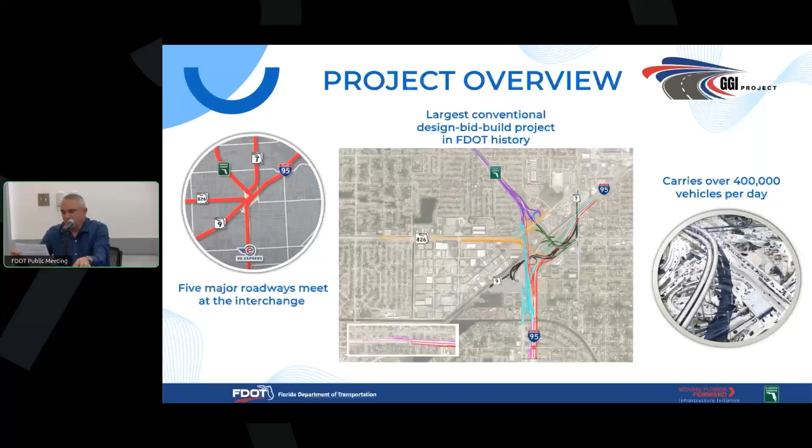The main purpose of the GGI project is to enhance regional mobility and revitalize this major transportation interchange, which includes connections to five essential roadways: I-95, Palmetto Expressway, the Florida Turnpike, State Road 9, and State Road 7.

The GGI project is part of the Moving Florida Forward Infrastructure Initiative. As part of this initiative, FDOT identified previously approved projects that were lacking funding for construction. $4 billion from the general revenue surplus has been dedicated to this initiative to advance construction projects around the state, such as the GGI project, that will address congestion, improve safety, ensure resiliency of our transportation network, and enhance Florida's supply chain and economic growth.

Let's take a look at the project area. This is an overhead view of the interchange. The Palmetto Expressway and Northwest 19th Avenue are the limits to the west. The limits to the east are at Northwest 167th Street and Northwest 2nd Avenue. The north limits are Northwest 199th Street and the Florida Turnpike, and Northwest 135th Street along I-95 are the south limits. The highlighted area represents the additional scope along the turnpike that was added to the GGI project.

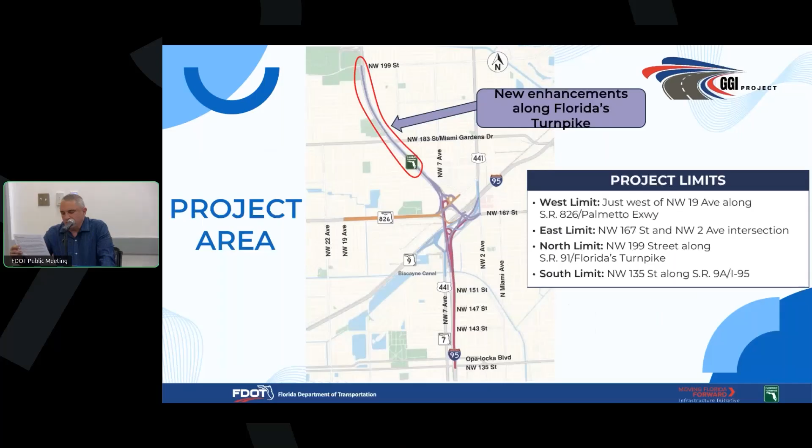One of the most significant components of the project is the construction of 34 new bridges. These bridges are designed to enhance regional mobility by creating more direct connections between major roadways and surrounding communities. As an example, this project includes a new flyover ramp that connects State Road 826 eastbound to I-95 northbound.

Safety is another major priority of the project. We are updating roadway lighting to improve nighttime visibility for drivers. New lanes and ramps will enhance emergency access and response time.

Another key investment area is drainage and long-term infrastructure resiliency. The project includes installing more than 50,000 feet of new drainage pipes. Here in South Florida, effective drainage is essential.

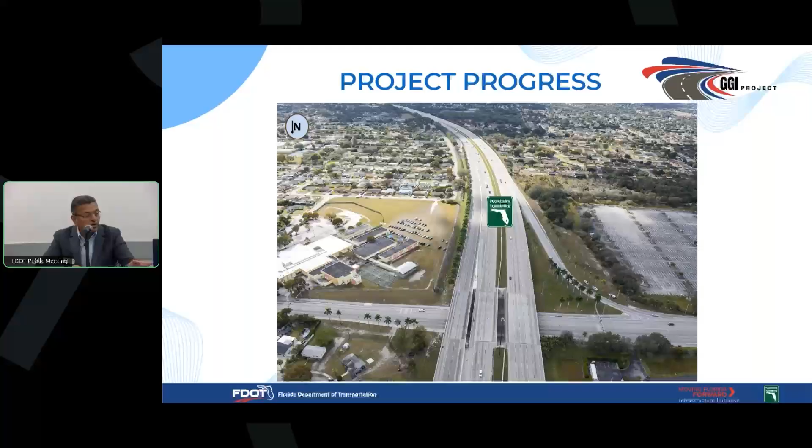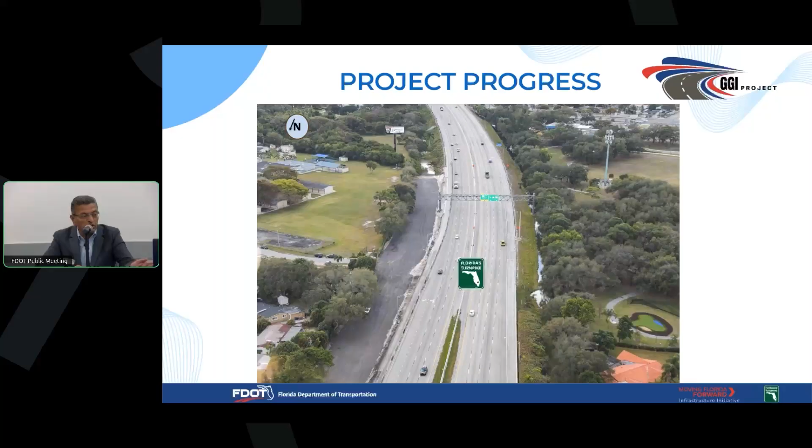And these are the visuals. Probably you've driven these multiple times, and you must have seen a lot of construction going on already. This is the area where you will see more construction happening pretty soon. We are developing the final plans, and then pretty soon, around the toll plaza, you will see the widening going on the northbound side.

This is what we call a typical section. It's hard for you to concentrate on the screen, but in the back there's a nice board. You can see it's basically looking north, and you can see the noise wall on the left side, on your right side, and the existing southbound noise wall will remain as is, as you can see in the picture.

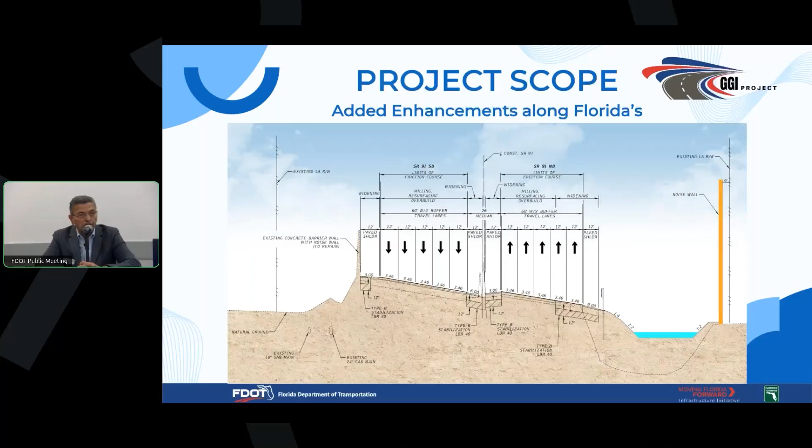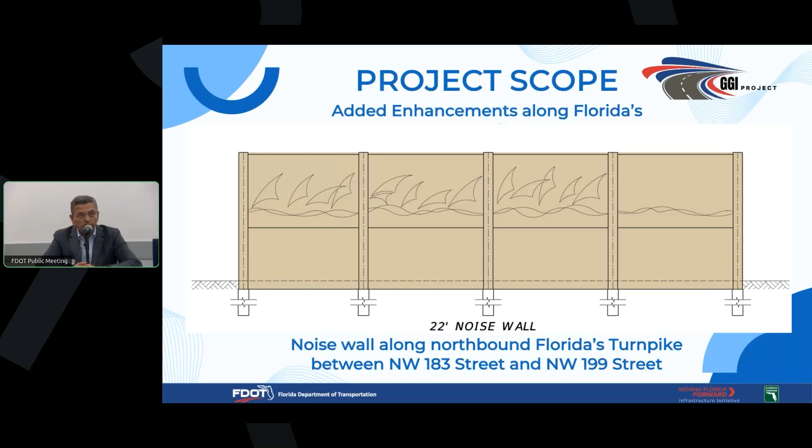We usually get a lot of questions on how our noise wall is going to look. It's a nice looking wall, and that's the finish you're going to get. When you're driving on the turnpike, that's what you'll see. This is at a height of about 22 feet.

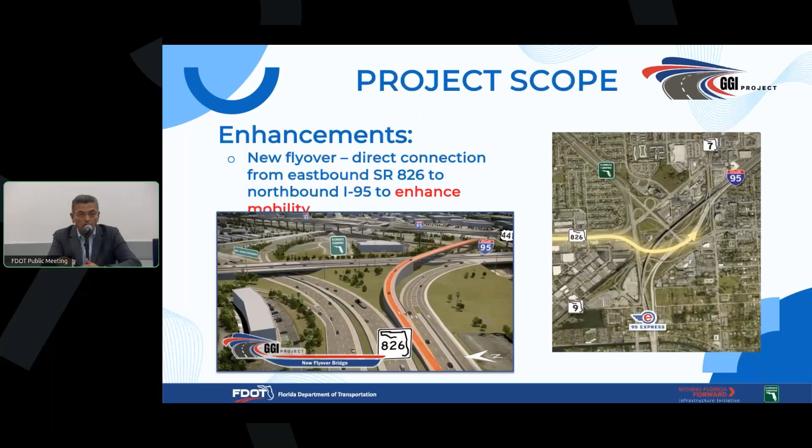Now, coming to the major project scope, which is already under construction, we're already over 700 days in. One of the major movements as part of the GGI is if you're driving eastbound on 826 and want to go northbound on 95, right now you take a very circuitous route, going south and then coming north, mingling with intersections and causing a lot of delay. As part of this project's improvements, we're building a direct connect flyover ramp going from 826 eastbound to I-95 northbound.

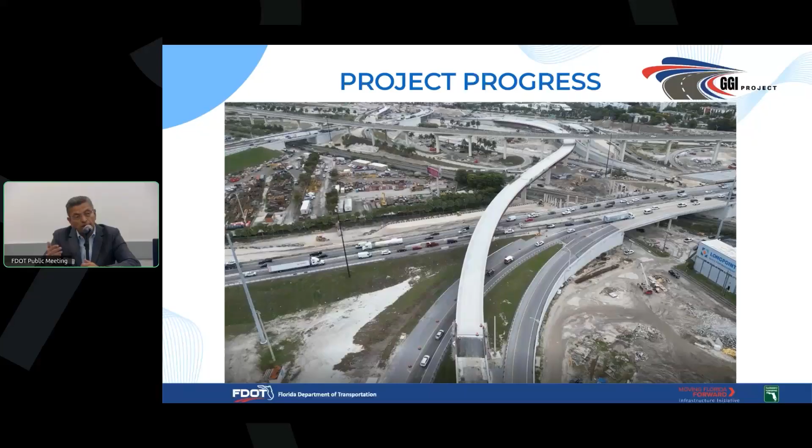If you've driven the project, these are the visuals and aerial pictures you'll see. That flyover bridge's work is pretty much complete, and we're trying to open it well ahead of schedule. The original scheduled opening date was somewhere in April 2031, but due to tremendous efforts by the contractor, who has allocated a lot of resources, we're now forecasting it to open in the latter part of 2026 or early 2027, which is a tremendous improvement for this project.

The next one is, you've seen there's a lot of traffic coming in on the Turnpike. Right now, there's only one lane going from southbound Turnpike to I-95 southbound, and that's caused a lot of delays over the years.

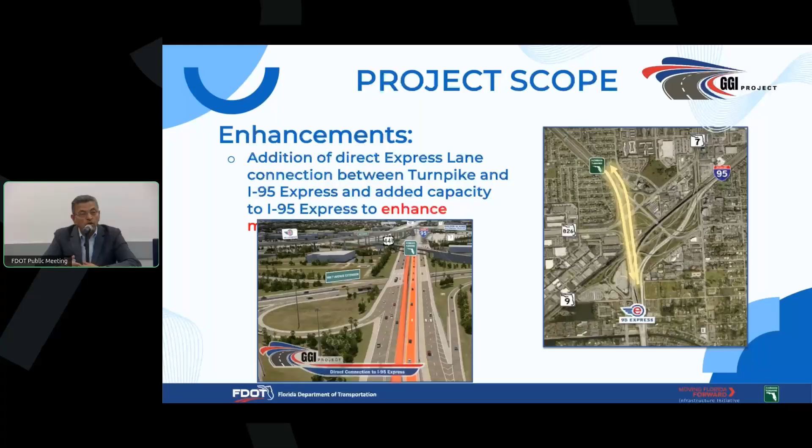Good news coming, but it's going to take some time. You're going to have two additional lanes - there will be an express lane plus two general purpose lanes, and that's going to change the dynamics of the whole traffic and the intersection. That's what the visuals you're seeing now show. We've made significant progress on that, but we're still working on it.

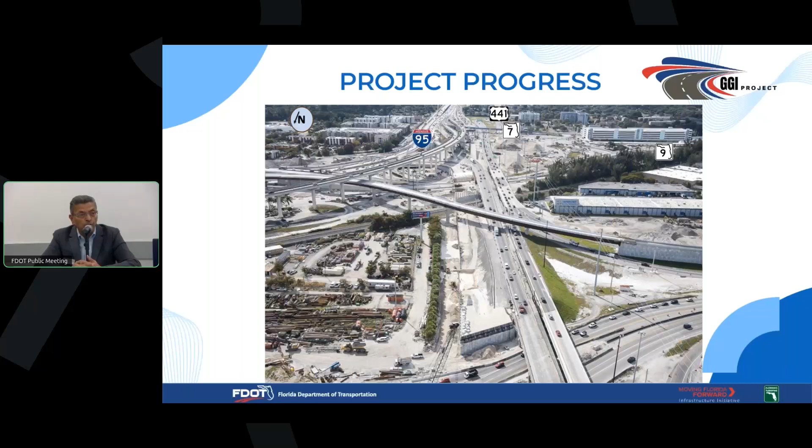Even though the project was originally stated at 7.5 years, we're making more progress. Definitely, this project is not going to take 7.5 years - it will be done ahead of that.

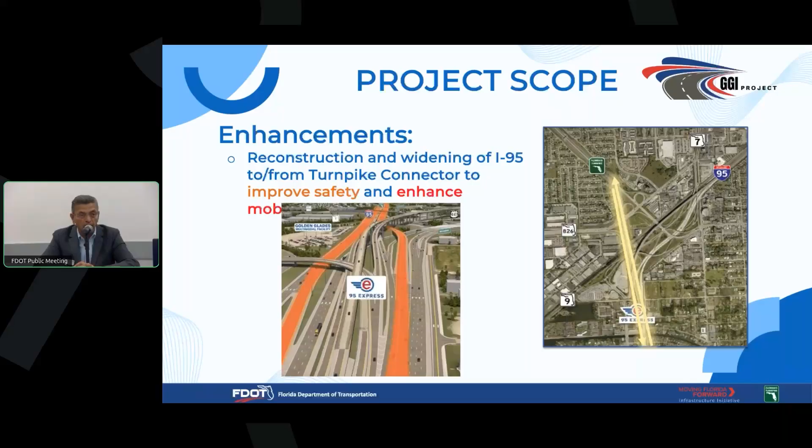95 widening is some of the critical work we're doing, and that's what's going to ease up the congestion. Most of the old bridges are gone, and we're putting up new ones. That progress is going on right now, and these are other views of the project progress.

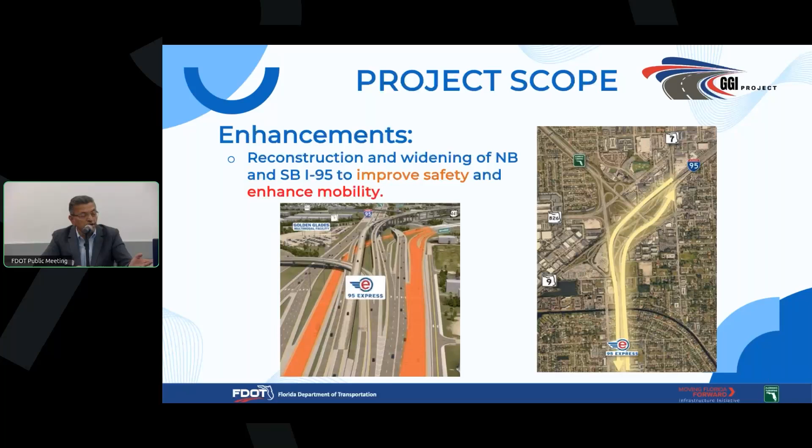These are the enhancements for the 95 and general roadway, so you can see that. One other thing about the progress - if you're driving southbound, we've shifted traffic onto the new facilities on the west side.

This job will be built in 4 stages. Right now, traffic is on the west side, and crews are working on the east side, because the traffic used to be in the middle. In a few months, we're going to take the traffic from the middle and put it on the new west side and east side widenings, which is happening right now. Then we're going to go back in the middle. In 2 phases, we're going to finish that.

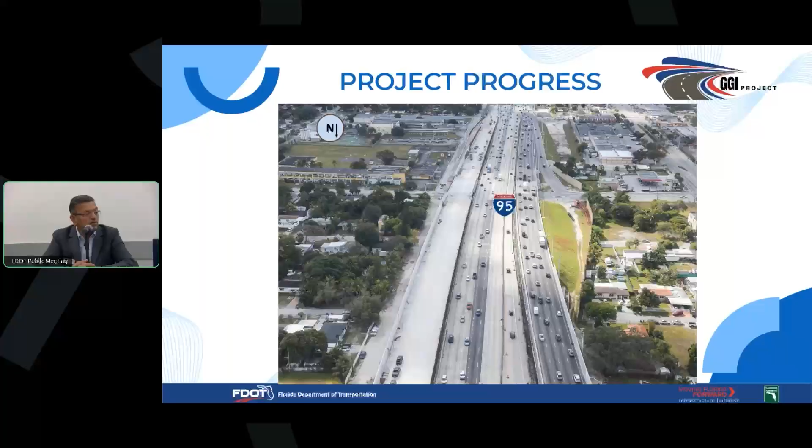So all this tells me this is not going to be a 7.5 year project - it's going to be earlier than that. We have some numbers, and these are other views.

So overall, this job is progressing very well.

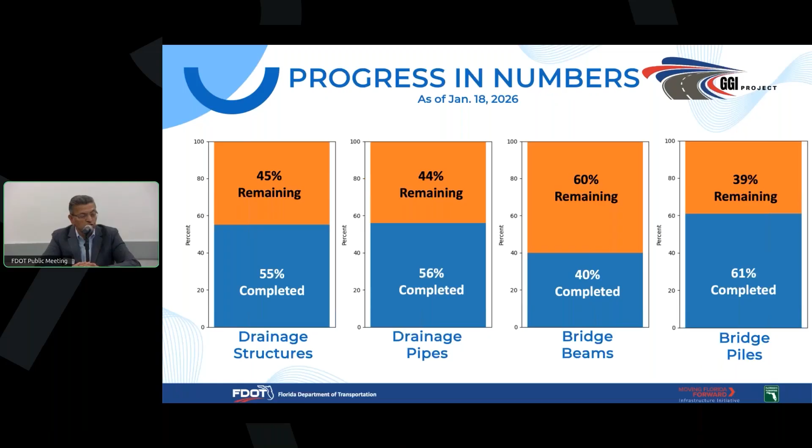So to build this project safely, we do anticipate some impacts to traffic flow while construction is ongoing. That means roadway detours, traffic shifts, lane closures, sidewalk detours, and around-the-clock work zones will be going on during the life of the project.

And this will increase travel times when traveling through the work zone.

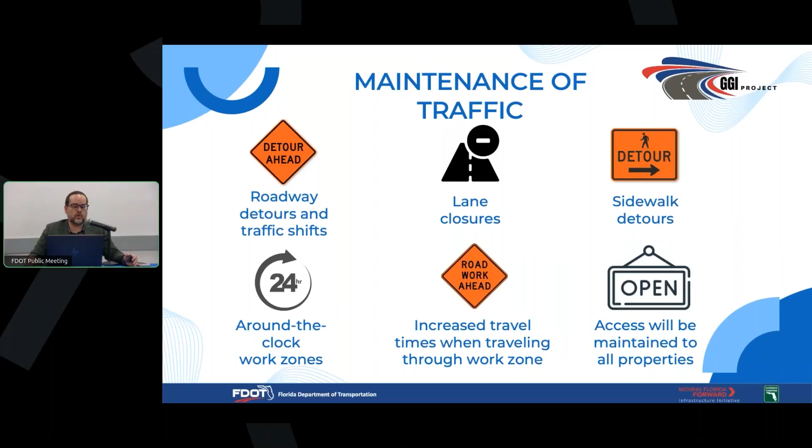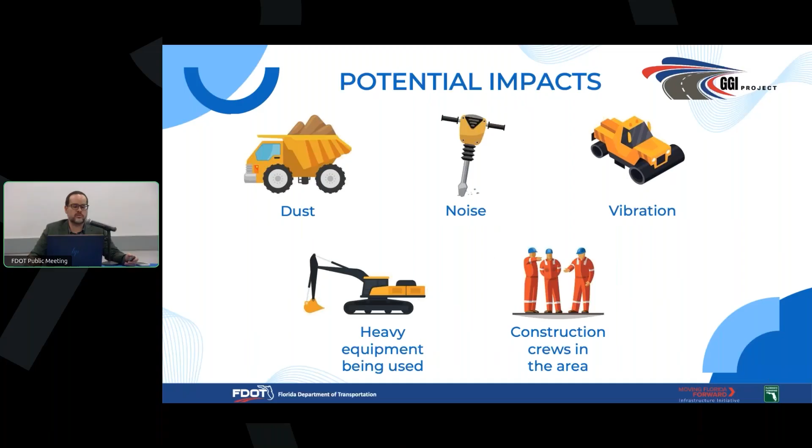We would like to note, very important, that while the project is ongoing, access will be maintained to all surrounding properties. We acknowledge that there are potential inconveniences while work is taking place, such as dust, noise, vibration, and construction crews in the area.

Our team is committed to implementing effective mitigation strategies that include water, sweeping, vibration monitoring, having certified flaggers as needed, and coordinating with partner agencies on a regular basis.

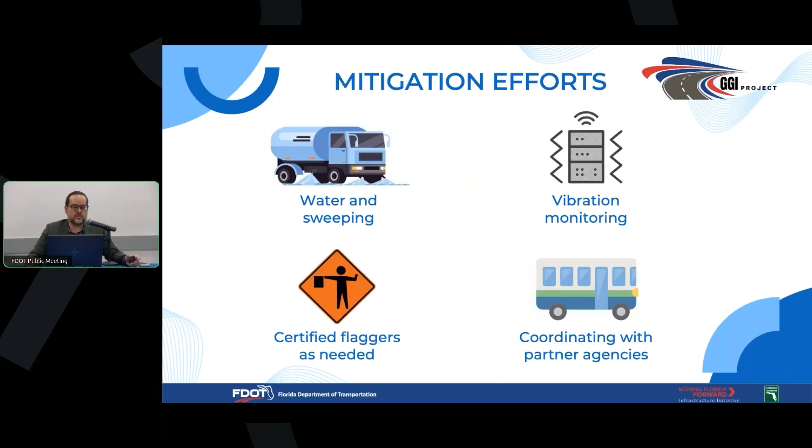As part of the GGI project, we use a platform called One Network. That allows the contractor to communicate lane closures in real time across applications such as Apple Maps, Google Maps, and Waze. Other mitigation strategies include using overhead dynamic message signs that you see on the highway to announce upcoming closures.

And 2 additional road rangers are assigned to the Golden Glades interchange.

We also coordinate with Miami-Dade County whenever we have a full closure and need to detour traffic, and we know there's going to be a good amount of traffic going through a roadway that doesn't normally see it, like State Road 7 or State Road 9. We coordinate with Miami-Dade County to optimize the traffic signal timing throughout the project limits.

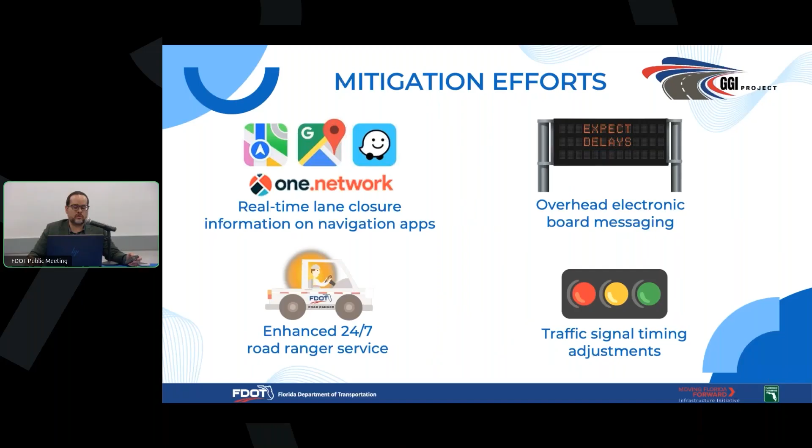FDOT understands the importance of proactive and effective communication with the community. The GGI project has a dedicated multilingual community outreach team, so that means we have project information available in English, Spanish, and Haitian Creole.

To better serve the community, we have a continuous combination of engaging the public via pop-up events and door-to-door visits, along with electronic project updates via email that also get posted on the project website, which is go-ggi.com.

We also use social media posts and videos to distribute important updates, such as upcoming roadway closures, detours, and progress information.

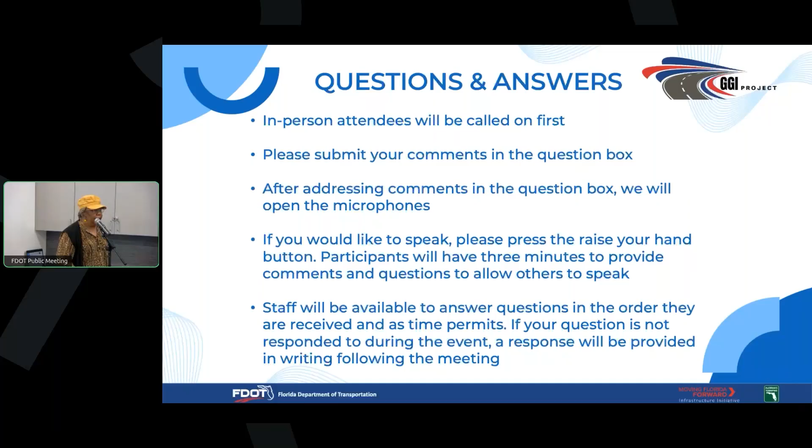Good afternoon. My name is Shirley Clark. My address is 19801 Northwest 7th Avenue. And I appreciate you gentlemen being here today.

But I just had an AI briefing. If you don't know the answer, ask AI and see what they say. This is a $1.4 billion project. They can put some money aside and build a forest if it needs to be. You can do anything. If we can put a man on the moon, we can make this work for this community. I'm just saying, you guys are smart, but AI is smarter.

Hi everyone. Again, following up on her comment, thank you for this forum. A few years ago, there was an article in the Miami Herald with columnist Dave Barry, and he did a humorous scenario where a police officer was in the Golden Glades area trying to deal with something, and he was driving around and couldn't, so he just said he's getting out of his car and he's just going to walk over. Don't know if that made a difference, but you mentioned the wrong way indicator.

I want to find out, are you also going to be doing any public forum to indicate when you're done? Because for instance, going on State Road 9, there's a connection to go to 7th Avenue, and if you didn't know that area, you could actually miss the spot. So I want to find out if there's going to be any PR when you're done, for us to be aware of the exits and the roads.